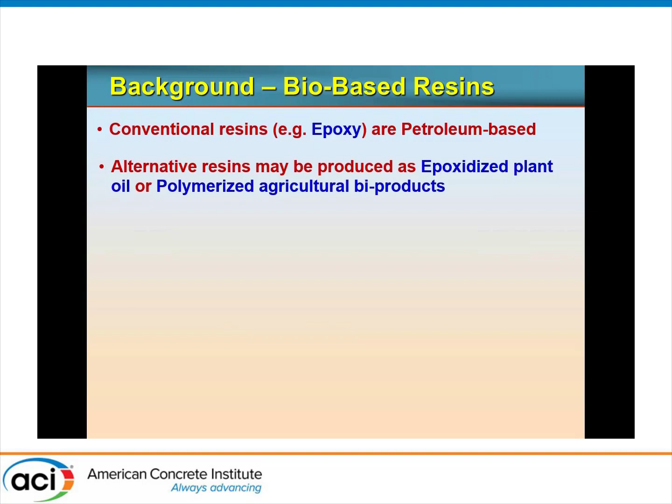Examples of bioresins include those derived from corn, sugarcane, soybean, pine oil, linseed oil, and probably other materials. One thing to note is that embodied energy—the energy required to produce the product all the way until it's in our hands to use—is substantially less for all bio-based materials. For example, in the case of epoxidized linseed oil, it's a fraction of that of epoxy in terms of megajoules per kilogram of material produced.

Another approach is to target the fibers and try to go towards sustainable or bio-based fibers, for example flax, hemp, and other types of biofibers. The problem is that natural fibers have much lower tensile strengths and mechanical properties, Young's modulus and so forth, compared to our traditional carbon or glass fibers.

It is our personal view as a research team at Queen's that if the industry wants to move towards heavy structural applications and go green, then our best bet would be the resin and not the fibers. What I mean by heavy structural applications is retrofitting concrete structures—reinforcing bars, plates, and sheets.

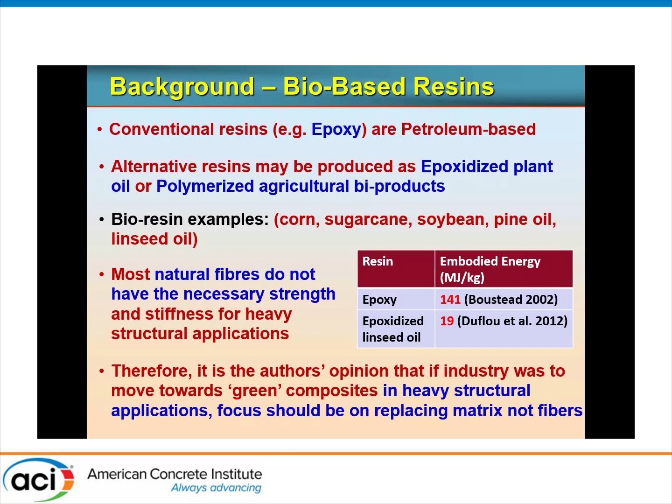However, there is a niche for other fibers, for example lightweight sandwich panels with insulated foam cores and FRP skins for aerospace and other lightweight structural applications, where we can use flax or other biofiber skins.

In some of our previous work, we experimented with a type of bioresin which is, to our knowledge, fully bio—furfuryl alcohol, extracted from corn cobs and sugar cane. It showed excellent results when used for confining concrete cylinders in terms of confined strength, very similar to epoxy-based resins.

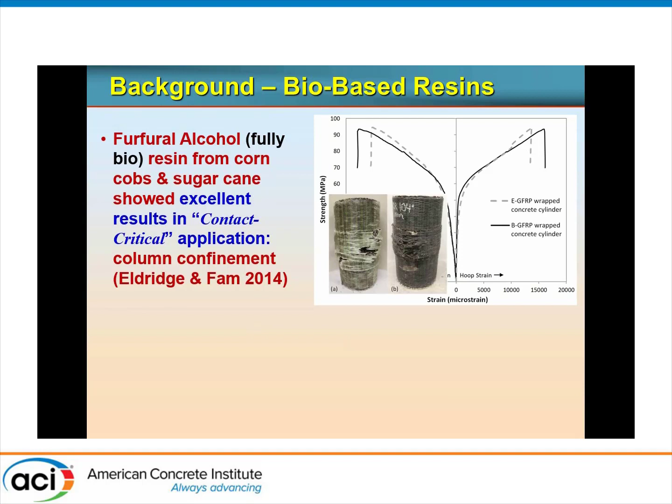But please note, this was a contact-critical application. When we attempted to use the very same resin in a bond-critical application, it was a disappointment. It did not bond well to concrete, and there could be something to do with the alkalinity of the concrete surface—that requires further investigation.

So we were quite puzzled. The reality is that this particular resin bonds very well to itself—so when you have a wrapped cylinder with an overlap, it bonds very well to itself. But to concrete, it was a different story.

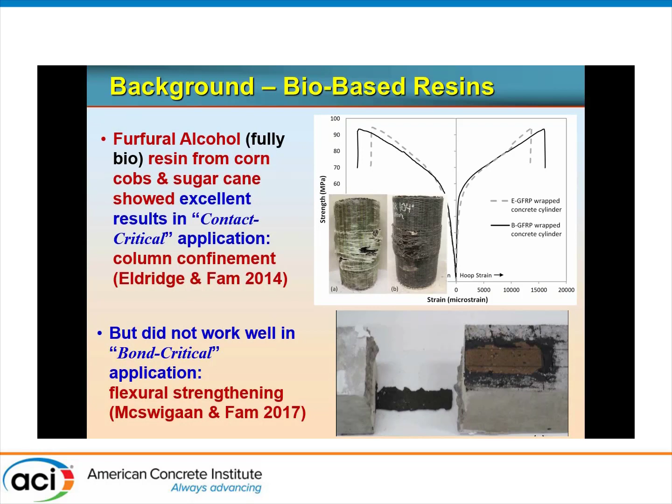We were quite ambitious—we thought 100% bio, okay, that was great, but it didn't work out. So we started looking into other types, and perhaps reducing our expectations to partial bio or blends with epoxy, as opposed to fully bio.

The objective of this study is to examine and compare three different types of bioresin blends. These are available in the market. We did not claim any kind of formulation or chemistry behind this, but they are far from being applied in civil engineering applications. The first one is a two-part system derived from wood and vegetable byproduct industries.

We call it VW, for vegetables and wood, and it's a kit, so you don't have much of a choice of the percentage. It is known that the final product by weight is 41% bio-based product. When I mean bio-based in the context of this study, I mean agricultural, undervalued byproducts and so forth.

The second one is a two-part cashew nut shell liquid, which we refer to as CN, that can be blended with epoxy, and it has its own curing agent. The third part is linseed oil, epoxidized linseed oil, ELO. This one also mixes with epoxy, but it does not have its own curing agent.

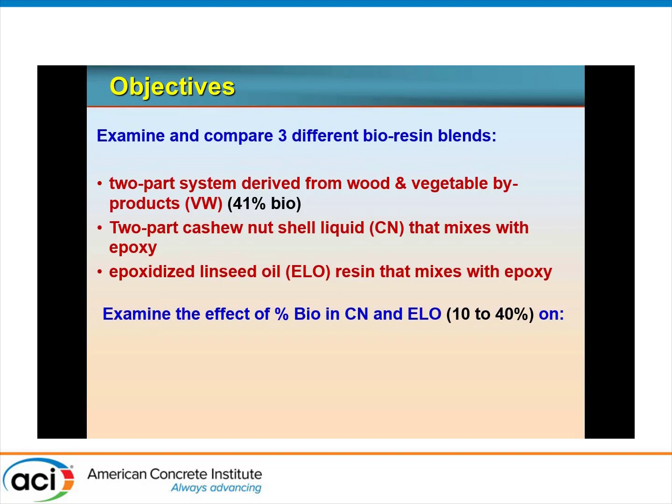The second parameter we looked at is the effect of the percentage of bio by weight in the final product, and we varied that for the second and third type from 10 to 40% by weight. The study also covered a range from tensile properties to lap splices, and of course bond to concrete for both carbon and glass.

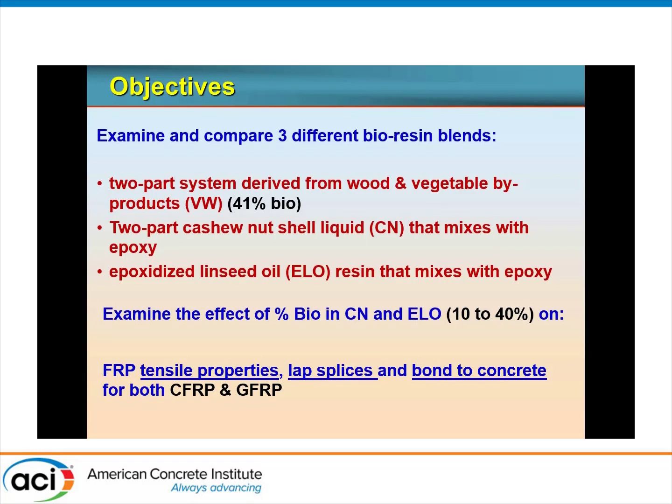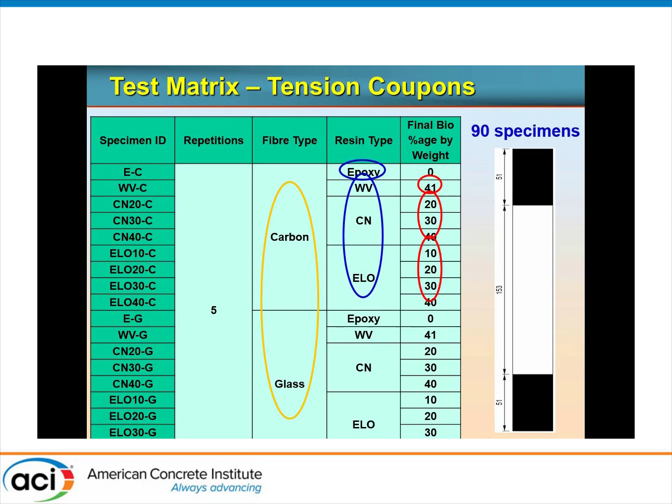This is the test matrix for the tension coupons. We basically compared epoxy to the other three types of bio-based resins. For the second and third type, we varied from 20 to 40% bio for CN, and 10 to 40% for the ELO. We also looked into carbon and glass, with 5 repetitions for the coupons, for a total of 90 specimens.

These are the standard ASTM D3039 standard tension coupons, as we know it.

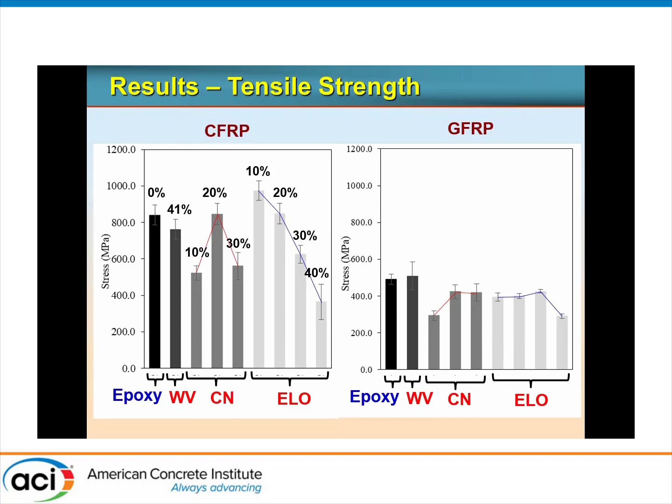For the glass, somewhat similar but not quite the same trend. The last two types did not come all the way up to the level of the epoxy control. So that is the tensile strengths.

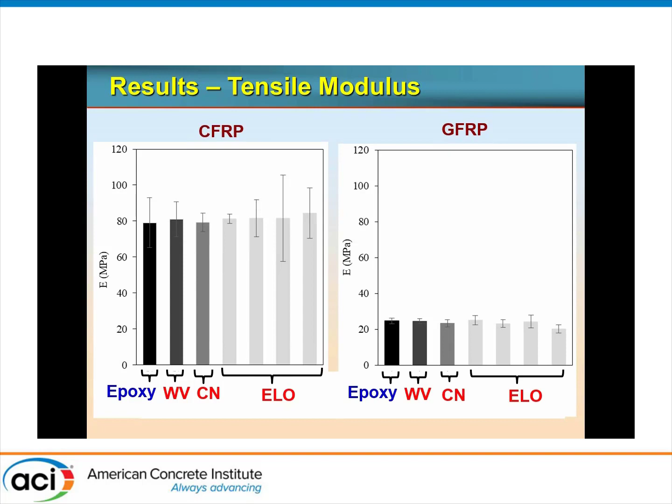In terms of the modulus, there's essentially no difference. You see the variation within the Young's modulus is higher than the strengths, because it's a bit sensitive to the extensometer and so forth to get the Young's modulus, and localized damage and so forth. But essentially there's no major effect on the Young's modulus of the coupons.

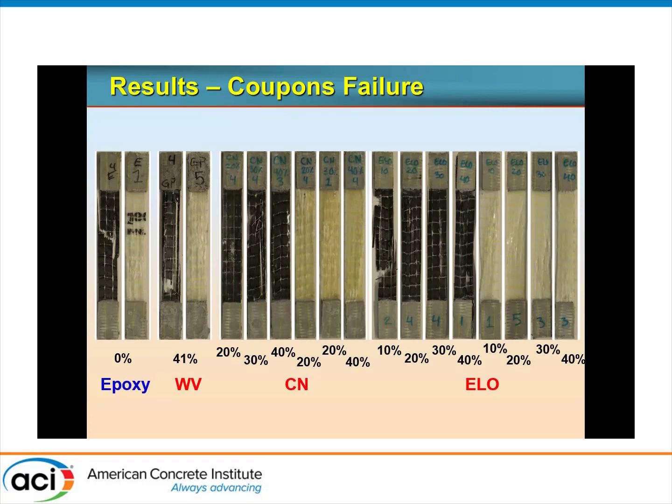Same with failure modes—we did not particularly correlate any particular mode of failure of the coupons with the type or percentage. One thing I should mention though is at the higher level of 40% in the second two types, the ELO and CN, the physical examination of the coupon was a little bit flexible. It was not as robust or rigid, if you will, as the lower percentage or the epoxy. That's a physical sort of examination of the material itself.

So then we started moving on towards the lap splice. You will need a lap splice in a variety of applications, for example when we wrap columns and so forth. So we used the same setup.

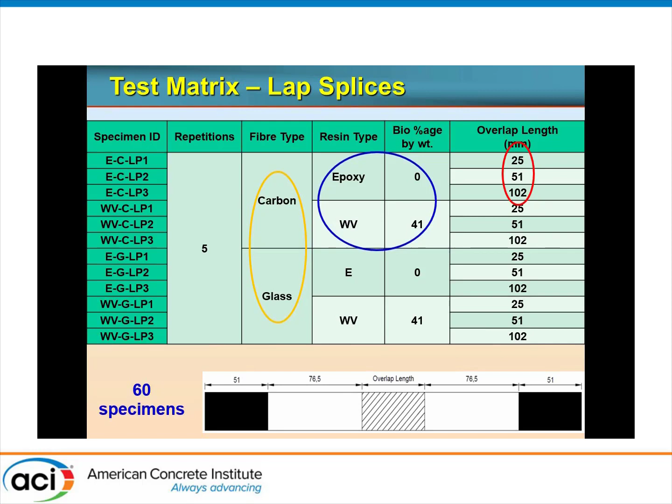In this case, it appeared that the WV product was the highest bio content that gave us comparable results to epoxy. It was the candidate we felt we should look into here for the splices. So we examined only the WV, wood and vegetable byproduct resins, compared with epoxy, and we varied the overlap splice using coupons from 25 millimeters, or 1 inch, to 4 inches, again for carbon and glass, with 5 repetitions.

Again, within the limited scope of this study, here are the results—that's the strength versus the lap splice. The horizontal line is what we got from the tensile failure of the coupons in the previous phase. And clearly, again, you increase the capacity, but you don't actually quite get to the full tensile strength up till 4 inches.

Again, the WV product came very close to matching epoxy. In fact, the dotted line here is the tensile of the WV, so I would argue that this is fairly comparable to epoxy. For glass, we had better luck approaching the full tensile strength of the material for both the epoxy and the WV resins.

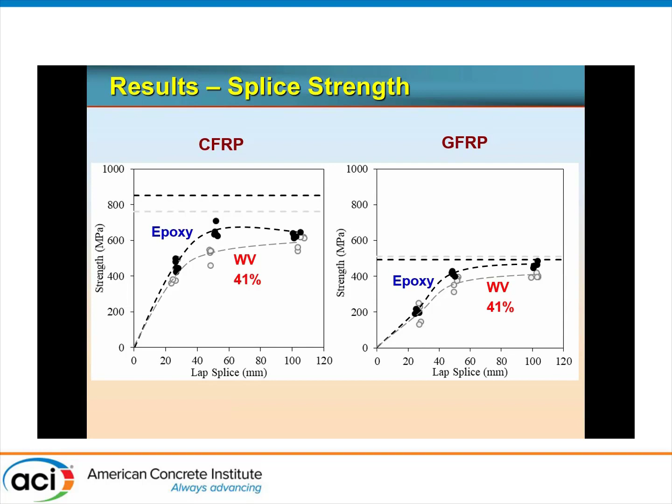Again, that's the failure of the splices. Again, bond failure within the interface.

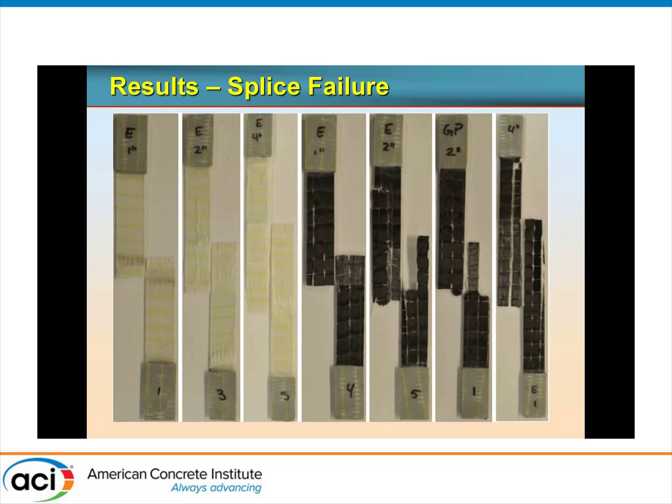We started then moving towards the bond to concrete, which was really the primary concern in the first place. Can the material be used to repair concrete or retrofit concrete?

In this case, we actually used the notched beam bond test, which was developed earlier by Gartner and Trey Hamilton and their group, and later adapted by ACI 440.9R as part of the testing protocol for bond. I find it actually a very useful, excellent method in that it gives you a quick, simple assessment and comparison between different products.

It captured an average bond strength because you could simply use the internal forces and get the force, and divide the force T by the bond surface area. You get an average bond strength to concrete. So that was the method we used.

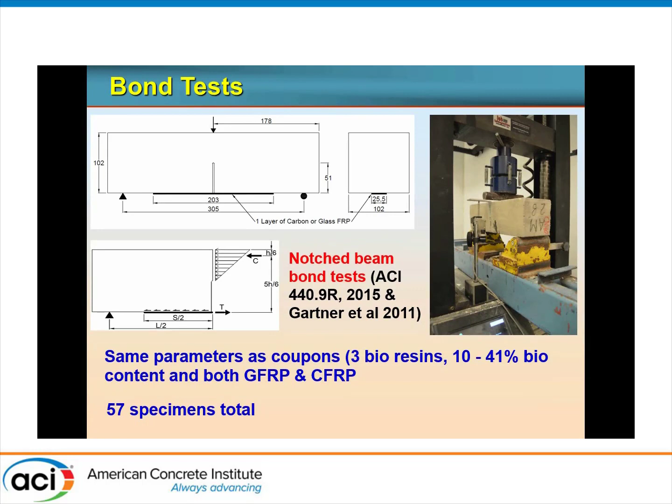We covered the exact same parameters as we did for the tension coupons. So the very first table covers all 3 types of bioresins, and carbon and glass, and we had a total of nearly 60 specimens.

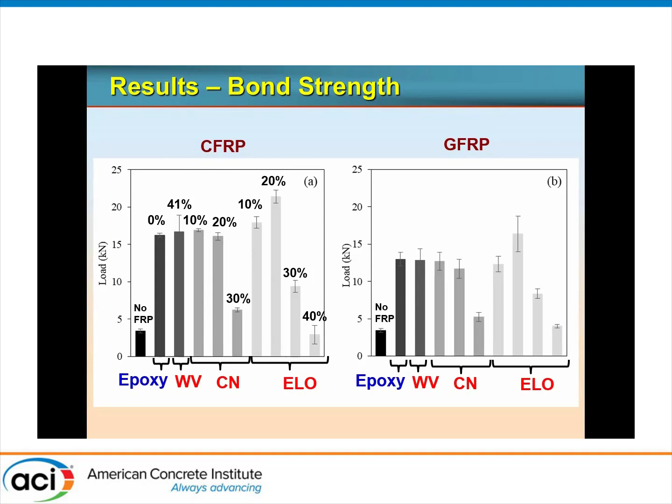But there were slight variations because there were a number of concrete patches, so there were slight variations in FC prime. So we thought we might normalize with respect to the changes in concrete strength. So we have the normalized bond strength tau over the square root of FC prime. It changed slightly from the previous slide, just to be more accurate.

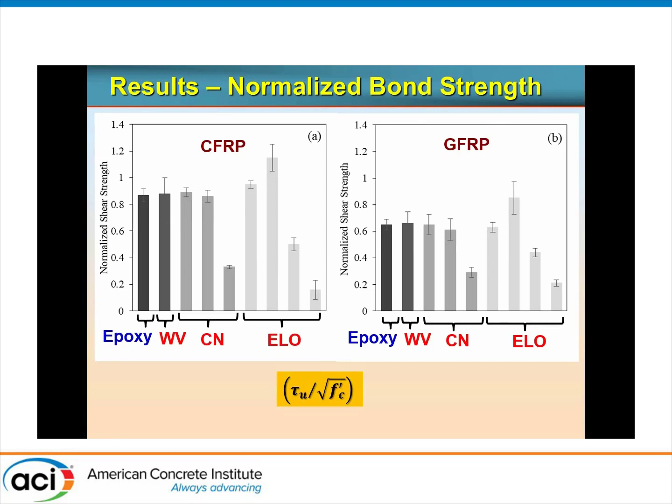This shows you again the normalized bond strength versus the percentage bio by weight in the resin. So that's the control epoxy, carbon and glass, for bond strength. This is the WV for carbon and glass. This is the CN, and that's the ELO, varying from 10, 20, 30, and 40, or 20, 30, and 40 for the CN resins.

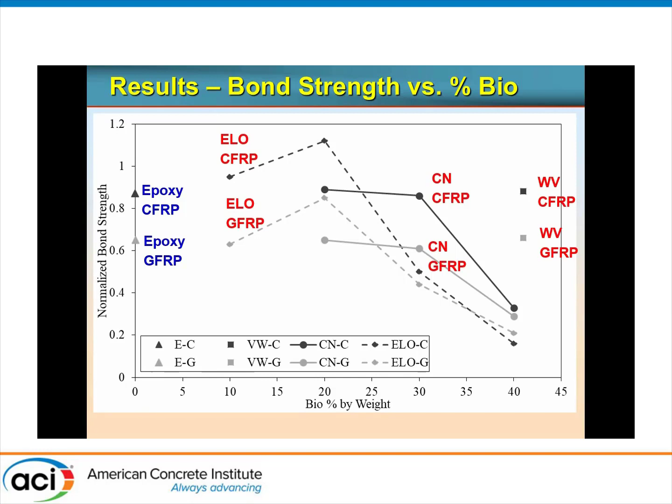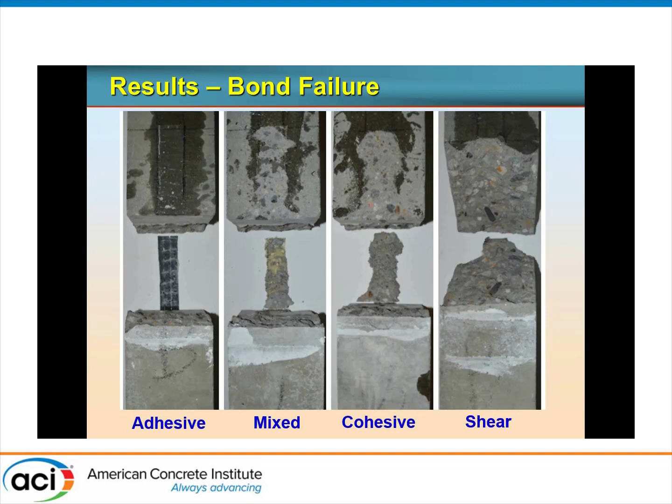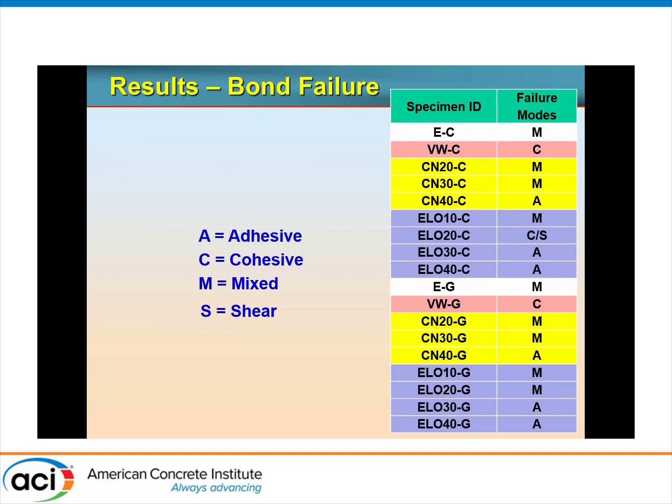So that's the failure modes. The epoxy carbon and epoxy glass were mixed. The WV was cohesive in both. The CN was mixed, and adhesive when you had 40%. The CN, same actually for glass as well, MM and A. For the epoxidized linseed oil: mixed, cohesive, and shear. In fact, one of the repetitions failed by shear, and then adhesive. So the trend is kind of the same as in carbon and glass for each type of resin.

So the conclusions from this study are that the resin that showed the most promising results, with the highest bio content of 41% and adequate tensile properties, was the resin extracted from wood and vegetable byproducts. It resulted in tensile properties and moduli ranging from -9 to +2% compared to epoxy for glass and carbon.

As the percent bio content increased from 20 to 40% in the CN type, that's the cashew nut based resin, the tensile strength increased until a peak at 30%. So at 30% was the highest value, then reduced when we went to 40% bio. At that peak of 30%, the results varied from epoxy from 0 to -14%.

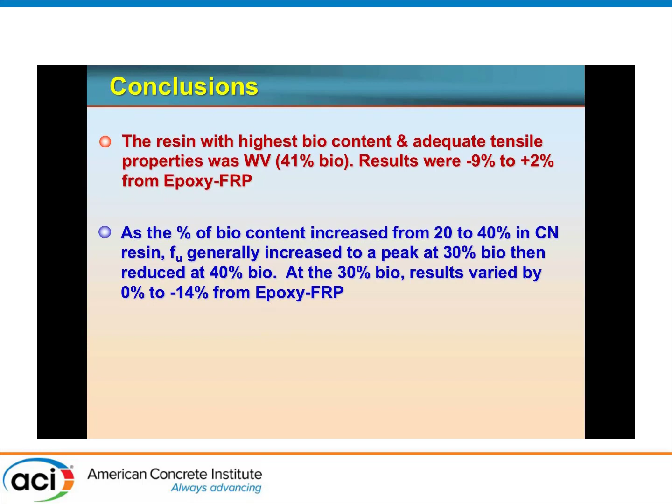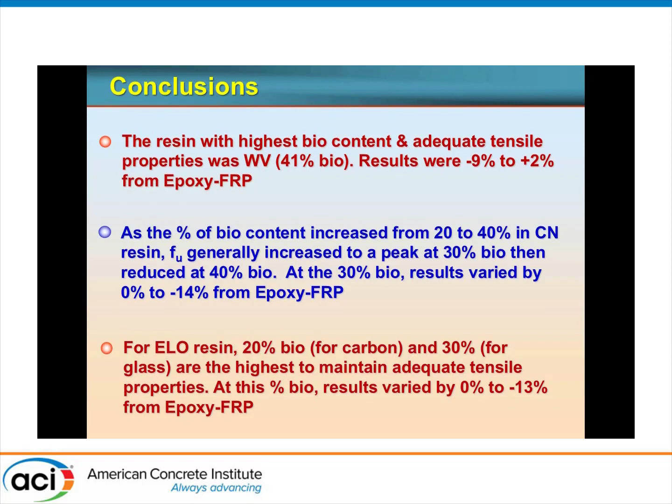ELO resin, that's the epoxidized linseed oil resin, with 20% bio for carbon and 30% for glass, is the highest or most promising for this type of bioresin, providing adequate tensile properties. At this percent bio, the variations from reference epoxy were 0 to -13%.

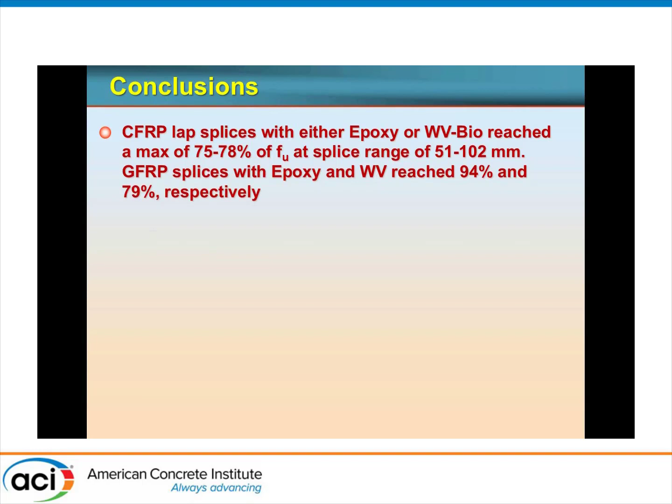The lap splices, with either epoxy or WV, because that's the only resin we tested for lap splices, reached a maximum anywhere between 75 to 78% of the full tensile capacity within the range of 2 to 4 inches overlap. For GFRP, we reached more, up to 94% or 79% for the two resins respectively.

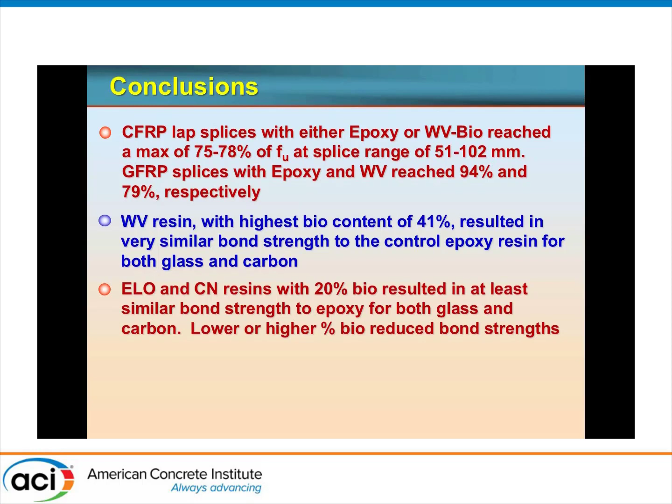The WV resin with the highest bio content of 41% resulted in very similar bond strengths to control epoxy for both glass and carbon, and that's bond to concrete. For ELO and CN resins with 20% bio, it resulted in at least similar bond strengths to epoxy for both glass and carbon. Lower or higher percentage bio affected the bond strengths in a negative way.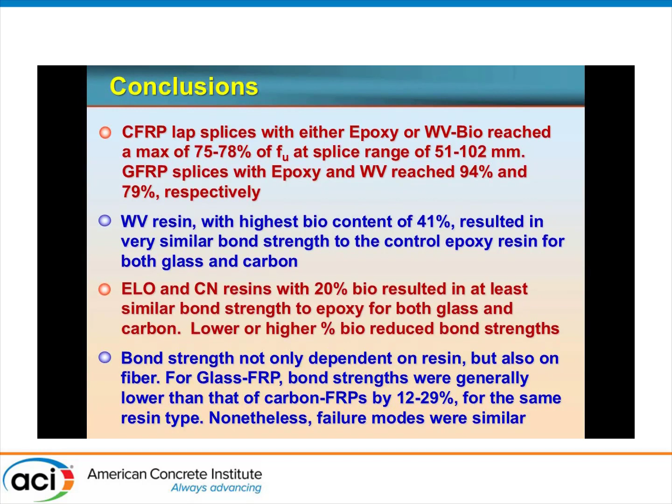Bond strength is not just dependent on the resin, but also on the fiber, for the same resin. For glass FRP, the bond strengths were generally lower than that of carbon by 12 to 29% for the same resin type. Nonetheless, the failure modes were essentially the same. So I think that's it, and happy to take questions.

Neat stuff, Amir. I really like what you're doing with the bioresins.

Question that came to mind: when you first started, you said you had a 100% bioresin that worked well in confinement, but not so well in bond. Bond critical, yeah. Would you be able to mix that resin with an epoxy to create one of your blends? I never tried, but let me tell you this - with my very limited chemistry background, there are apparently two different classes. The furfuryl alcohol family is completely different from epoxy or epoxidized green resins. So these vegetable or other products are epoxidized, so they're compatible with epoxy and you can blend them. I've never tried to mix the furfuryl alcohol. Yeah, the reason I was thinking was because you didn't get the good bond, whether you could create a primer that was a blend and then use the 100% for the flex, because the more we can go to 100%, this is an open area for surface treatment. We feel the pH has to do with it, but we haven't put our hand on the exact reason.

All right, well, we'll talk about that one some more. Sure. Thanks, Amir. Thanks, Ars.

I just have a question for the bioepoxy, for the bioproduct. Does it have a durability issue, or have you read some literature or other researchers discuss this?